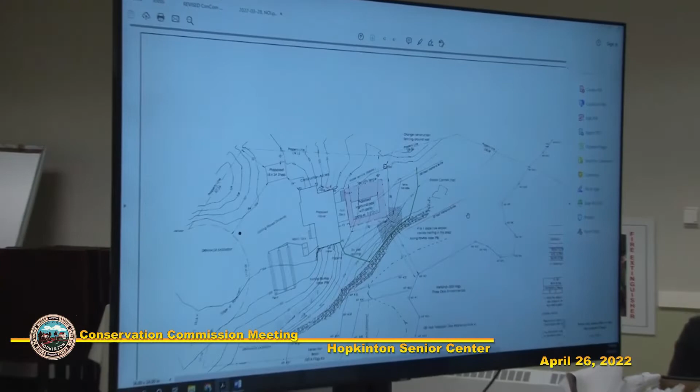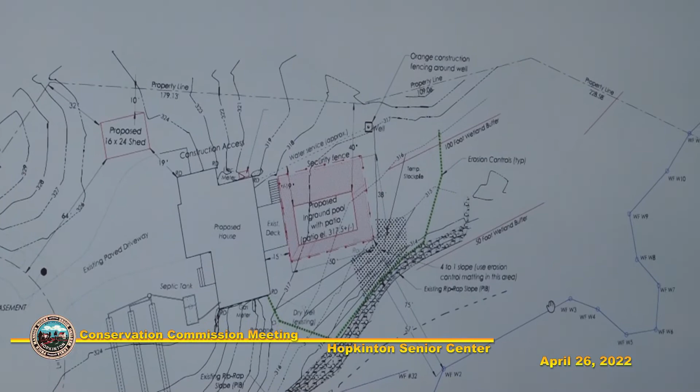Would you like to give us a quick overview of what you'd like to do? So you can see the site plan up there. This is a proposed in-ground pool on an existing house lot. Only part of it is within the buffer zone to a BVW located on site to the south of the house. There's only about 670 square feet of permanent impact to buffer zone, and the rest is temporary.

There's some minor grading associated with the pool, and erosion control, that green line, goes pretty much around the whole limit of work on the wetland side. In the steeper slopes, that hashed area in the corner, we're using erosion control matting because of the steeper slopes. We want to make sure no erosion goes down into the wetland, so it's a secondary erosion control to provide that.

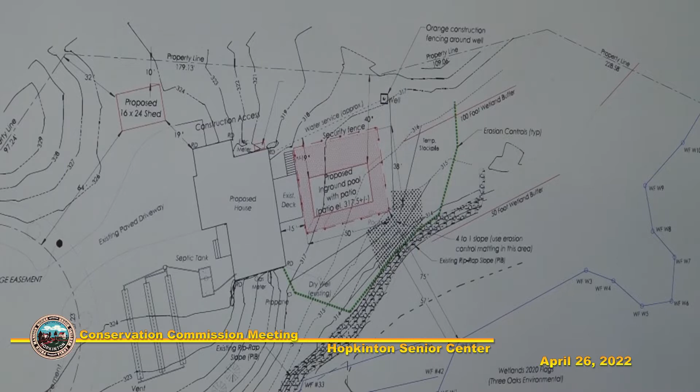We did receive some comments from Lucas Environmental just this past Friday. I do have some responses, haven't emailed them to the commission yet, but I had one concern regarding one of their comments about how Lucas Environmental would like to review these flags, and they weren't on site when they did the site visit.

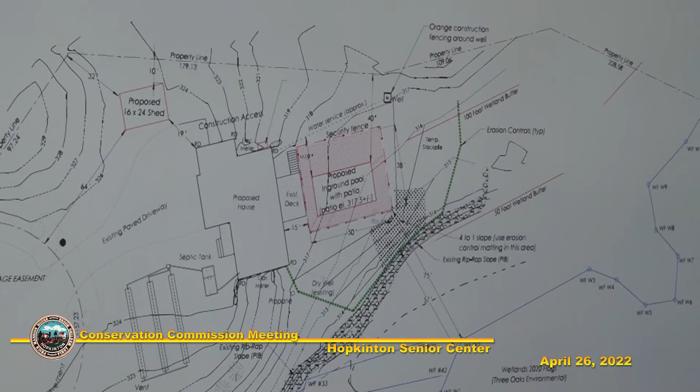Goddard's response to that is that this house was just recently built, and there's an order of conditions issued in 2020, so the wetland line is still valid even though it was closed out through a COC. It's valid for 3 years, and with the state of emergency COVID tolling, it's actually good until October of 2024. So it's our opinion they don't need to review these lines, because during that process they had already reviewed the same exact line and agreed in their response that it was accurate.

Okay, so I'd be happy to answer any questions the commission has. Yeah, so Joe, why don't you go through your comments? We don't need to address the responses, we'll give Lucas time to go through those. And I think the one you mentioned was really the one that needs to be addressed.

And I assumed that the delineation was still valid, because the COC was recently issued. Yep.

Yep, still valid. I think the point, maybe it wasn't stated well, was that documentation of that should be provided in the application for the record, just to demonstrate that the filing or the delineation is still current.

In my response, I've provided, I think Kimberly gave us the OOC from that filing, and so we can provide that as part of the record, attached to our response. I don't think we had any other major issues.

Is there a dry well proposed for the pool? The backwash? Not for the pool. There is an existing dry well that comes off the corner of the house. I don't believe there's one proposed for the pool specifically.

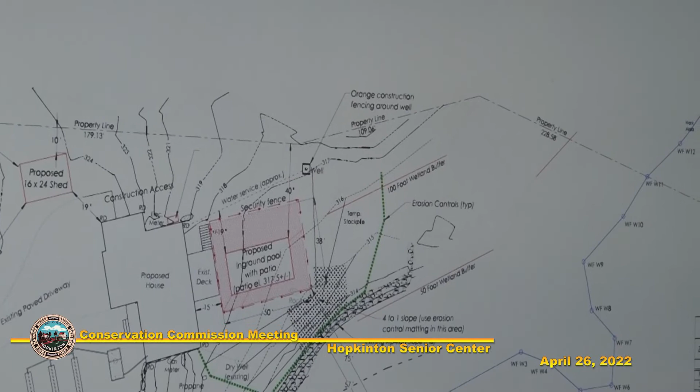That was one of the comments Lucas made, that you can see on the top side of the house there's that little red rectangle with no label, and that's the proposed filter and heater. These are updated plans here in front of me, and I have copies I can provide. The filter and heater equipment is pretty far outside of buffer zone.

How many copies? Is that for everybody? I have 4 copies. I think we're good. Those are the changes to the site plans that Lucas had requested.

I'm not sure, since the filter is way up here, if it's really far away from the buffer zone and the wetland, so I don't know if that changes your opinion on that.

It's easy to connect a hose to that and run it down to the buffer zone or wetland area. I don't think it's a heavy lift to put that in if we can put it in the upland area, where the proposed filter and heater equipment is. I think that would be my preference - add a dry well up in this area, outside of the 100. Of course, but other than that was my only comment.

I'll open it up to the other commission members. Not right now, for me. I gather we're not closing this time.

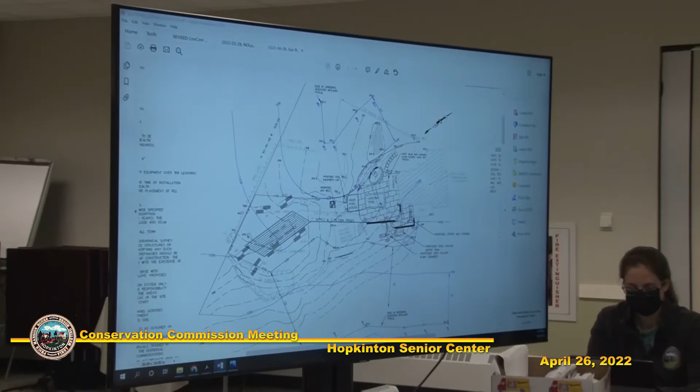This may ring a bell with the commission - it was granted a minor exemption for the construction of the pool back in June of 2021, and that is the existing pool location you see on the plan adjacent to the home. What we're really talking about is an expansion of that permission, to take an existing patio and expand it to a larger area, introduce a couple of structures: a pool house, an outdoor kitchen, a fire pit, those sorts of amenities.

The pool house obviously needs pool equipment and a dry well for maintenance activities, so there's an awful lot that needs to take place outside the home. We've got issues inside the home as well - Matt is expanding the room count inside the home, so the septic system needs to be enlarged. Before we cut off our only access with construction of the pervious patio and pool house, we're going to expand the septic system location very near, almost on top of the existing system, with innovative technology that allows us to get the area we need in that same general footprint.

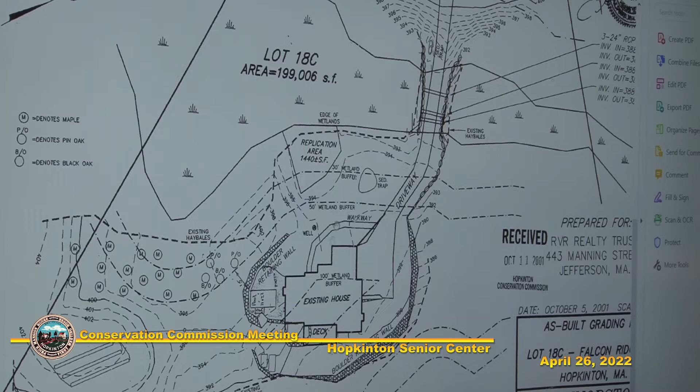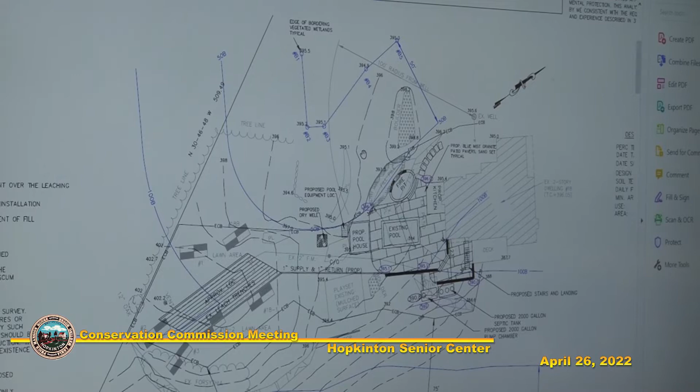All of this takes place in areas that are previously developed. A moment ago Kim flashed that plan - there's an existing patio structure out there now, adjacent to the home. In that area there's a boulder wall and a patio, and then the septic system and connected areas are grassed, all lawn. There's also a small play area for Matt's two children - swing set, slide, that sort of thing. So the area is already previously developed as lawn or some other amenity. So what we're asking the commission is to consider allowing us to move forward with the patio construction, retaining wall construction, and the placement of a couple of septic tanks, piping, and a new leach system.

Okay, great, thank you. Joe, did you want to go through your comments? Yeah.

During the site visit, it was noted that the existing stockpile is located within the buffer zone, within 50 feet of the wetland. The stockpile does not have any erosion controls around it. That needs to be addressed.

Wetland flags A4 and A5, in Ellie's opinion, were approximately 5 to 10 feet low. Which ones were those? A4 and A5. Okay.

And there were some other minor issues on the forms, as far as which boxes were checked, indicating that the BVW forms should be attached, and on the Hopkinton bylaw supplement form indicating it as an IVW, not a BVW.

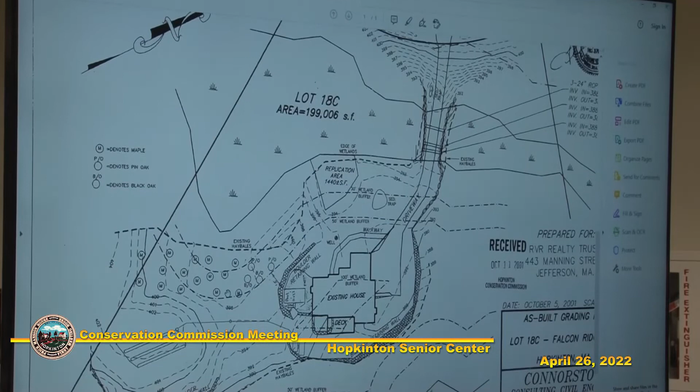Okay, so Joe, there was a wetland replication area that was done previously. Kim, can you go back to the other site plan? So up, yeah, in the western portion of the site right there. And then in the southern portion, there was some disturbance when the house was being constructed, and that was kind of mitigation. Do you know what the status of that is?

No, I do not. I assumed that the COC was issued, that the Conservation Commission was happy with all the activities that took place at the site. Okay. All right.

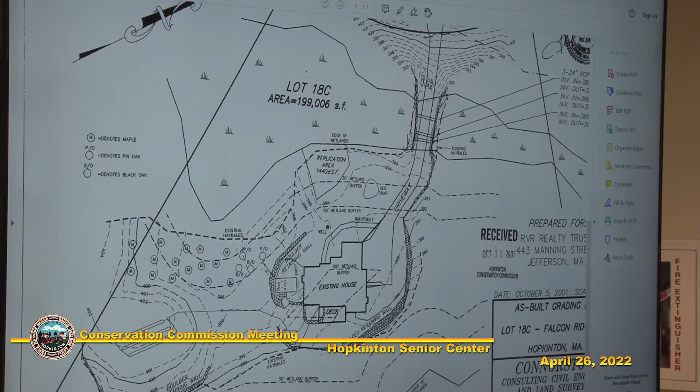Joe, did you happen to notice when you were out there? Actually, Jake Pennis from LD did the site inspection on this property. I did speak to him about this briefly. He said that where the plantings are shown - I had not seen this plan before tonight - roughly corresponds to where a tree line is shown on the current plan. And he said that currently there's lawn up to the tree line, so I don't know that any of those plantings are still there.

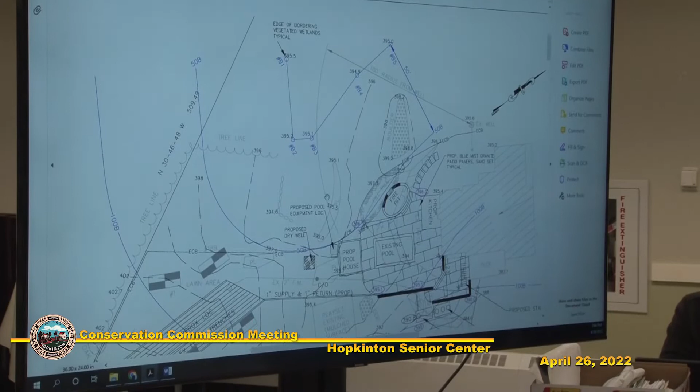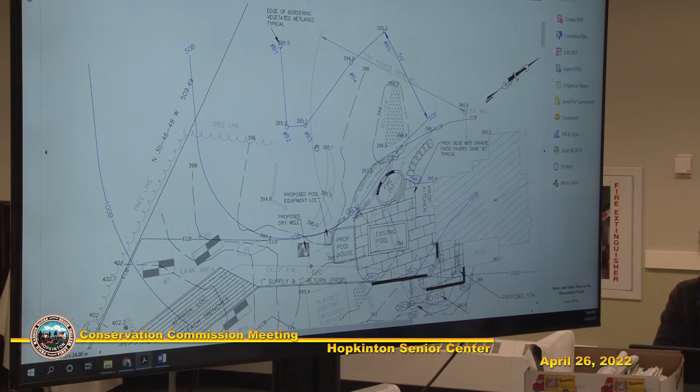If you can pull up the tree line on that current plan, see about where that is. Yeah, let's confirm it'd be up there, top there by B2, right? Right. Oh, up here? So that's, appears to be where the plantings are shown on the COC plan. All in that area there, and that's grass area right now, you're saying? Grass area and a landscape bed, correct. Okay, all right, so we need to reconcile that. That may have been inadvertently changed, the lawn area.

And then I guess the other question, Joe, is once the septic system is upgraded and all this new work is put in, if something goes wrong and it needs to be maintained, how are you going to get access to the system? In 5 or 10 years, the leach field needs to be maintained. I wouldn't think the owner's going to want to drive an excavator through the pool area and fire pit. Hoping to avoid that.

No, we would have to come back and talk about an access route through here. Now, this is a drip dispersal system, so the tubing is half-inch. The manifolds are in this location here, so it's unlikely heavy machinery would be necessary. A wholesale replacement would be a very different story - we'd have to bring large equipment in to remove that, reshape that. We chose the drip dispersal because it's generally benign. It doesn't need a whole lot of extra materials, stone or fill materials, those sorts of things. So I hope the technology we chose would minimize that concern, but the access would have to be around whatever is built.

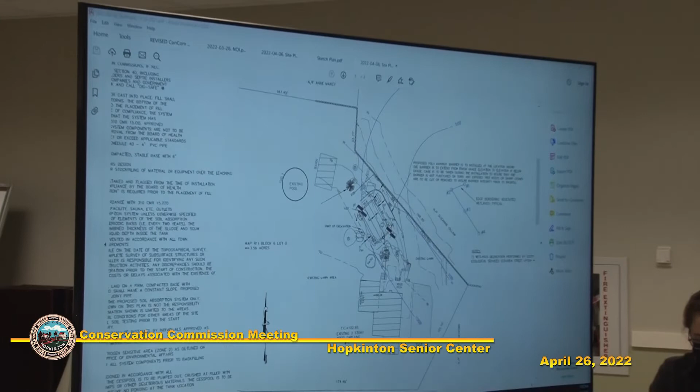So what Bob asked us to do was to develop a plan for a replacement septic system for the cesspools. We have introduced a leach bed here in the back, new septic tank, right on top of the old plumbing. The cesspools will be demolished, the new tank will go on top of the first cesspool, the new leach bed will go on location of the second cesspool. All in areas that are lawn.

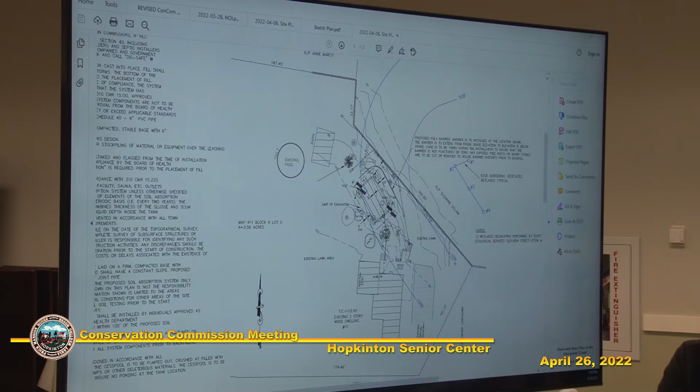There are a couple of amenities, a fire pit and some shrubs and trees just off the periphery of the system, but the system will be relocated in an area that is currently lawn.

In doing our site reviews, we identified an area of some concern off-site to the northeast. We had Scott Heim, Northeast Ecological, take a look, and he delineated a BVW edge here. The site flows from a high point up in here somewhere from west to east down towards that wetland, so it's all heading in there.

This area is moderately sloped, and we feel we can introduce that new septic system in a location that'll work well for the plumbing inside the home, the existing conditions there, and maintain a separation to the BVW edge. I asked the commission to consider the plan.

Okay, it looks pretty straightforward to me. Joe, comments? Yeah, I think the major comment was that some of the wetland flags appeared low. Flags 1 and 2 approximately 10 feet low, and flags 3 and 4 more significantly, maybe 15 to 20 feet too low.

So 10 to 15 feet, you say? Well, 1 and 2, 10 feet roughly, and 3 and 4, 15 to 20. Okay.